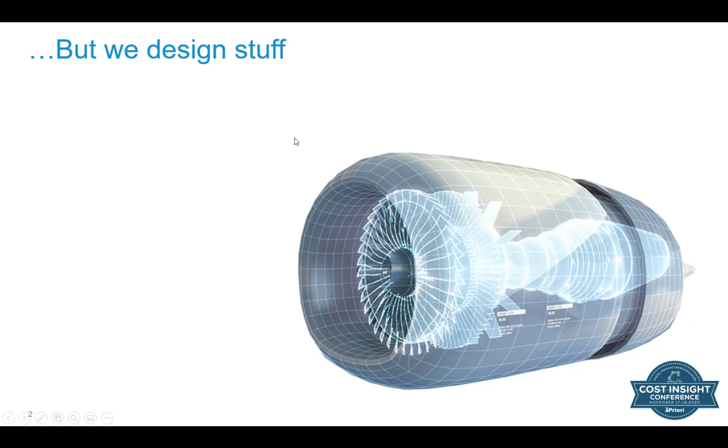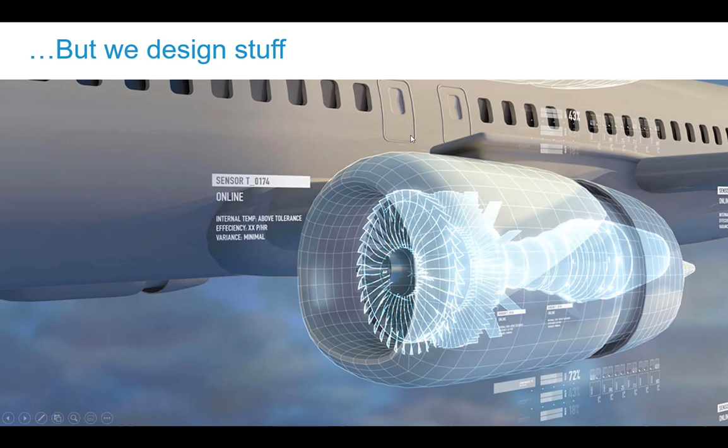Its primary function is to keep that aircraft in the sky, and cost becomes a close second, but it's increasingly more and more important for organizations that develop products. These pressures around cost come from different areas. Traditionally, they've come from finance, procurement, or even program management, where the program manager needs to ensure that product is meeting its budget constraints and is getting to market on time. But pressure is also coming from the world of value engineering, from the competition and the shareholders. The marketplace is creating pressures on the design teams to focus on cost early on.

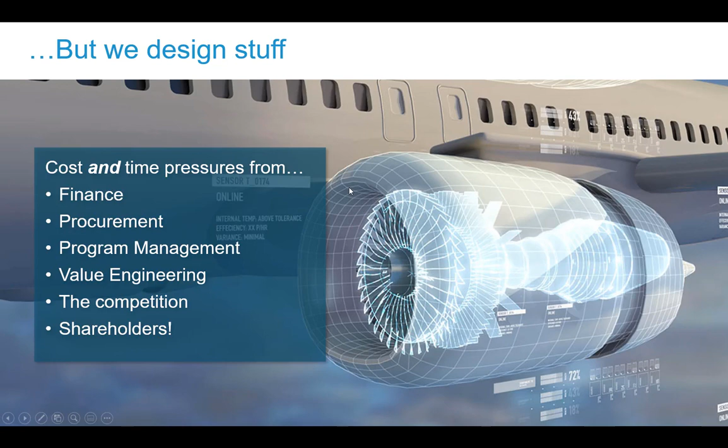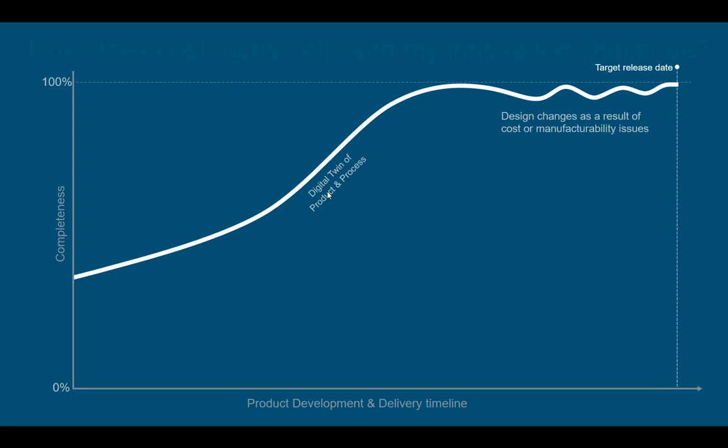Of course, we cannot afford to compromise the most important thing, and that's meeting the requirements of the design, especially if safety is a big factor. But we can focus on cost and focus on innovation at the same time. In fact, if we do, it helps our innovation challenge. If we think about the progress of developing the digital twin, the definition of our product, if we don't define it right or we get things wrong, we end up with lots of unnecessary change at the end because of design to cost or manufacturability errors. And making changes at this end of the life cycle is very time consuming and difficult. We'd rather incorporate it early on and avoid this late stage change.

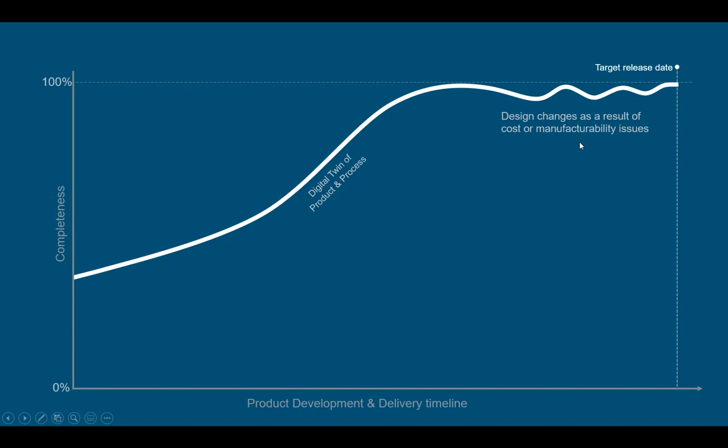So we would like to focus on cost and manufacturability early on so we can eliminate that late stage change, and that actually releases more time for engineers to focus on what they do best, innovation, and doing it with a finite amount of resources in the business to create the best products but that are affordable and right for the business. Over the period of that life cycle, the ability to influence cost goes in the opposite direction, and that's why aPriori uses the digital twin to simulate manufacture to understand where these issues may lie during the design phase.

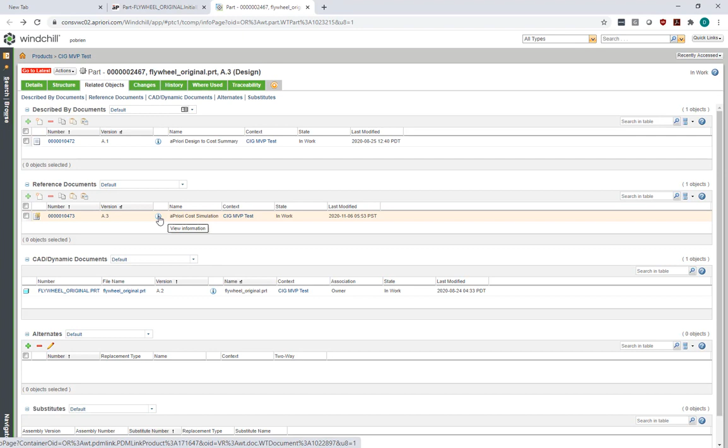But what's really important is, how do I actually solve those issues? What are they? So also attached to the part is the simulation itself. This is a simulation that's performed by aPriori on my behalf in the background. And now as a design engineer, all I need to do is read through the series of issues and understand if I can accommodate them in the design without compromising design quality.

This is a flywheel. It sits within a drive system of a drill. And that flywheel has two functions. One is to provide rotating mass to retain inertia, and the other function is to provide cooling for the motor which it is driven by. So I've elected to design it with large counterweights and some fins. And then I've got some structure to hold it all together as a single die casting part, as you can see over here. Now, down below here is a series of issues I need to now look at and consider.

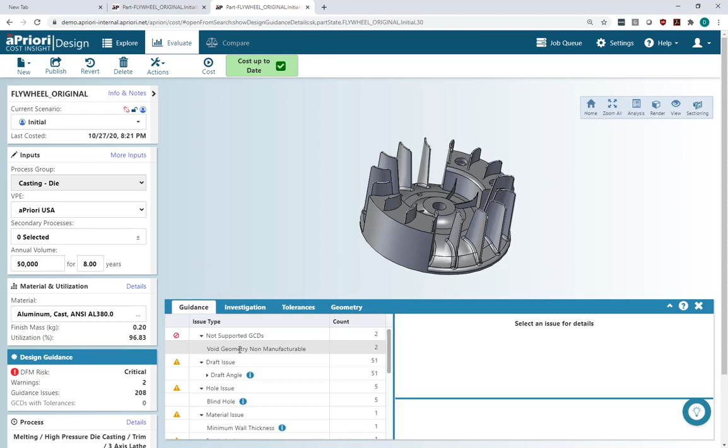The first one here is void geometry. I've designed voids into this component, which are not possible to make in a traditional die casting tool. And therefore, I need to know about this now, because I could send this off to the supplier. They could go to the tool maker, they could have a discussion about whether this is really required, come back to me a few days or even weeks later and have a discussion on email that could just delay the whole process of getting the first component made.

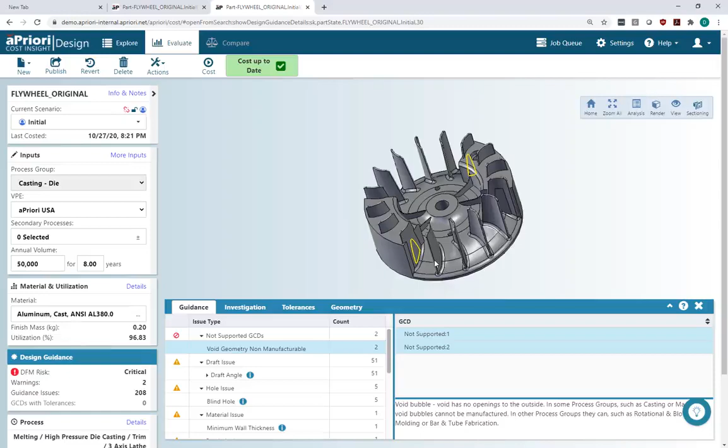I also have issues around draft as well, and there's a similar situation here, whereas if I don't consider draft angle in the design and all these yellow surfaces don't have any draft on them or don't have enough draft based on the requirements for manufacture, then I could send this to supplier, and again I could take a few days or weeks to get through the conversation about what the assumptions are and how they're going to do this.

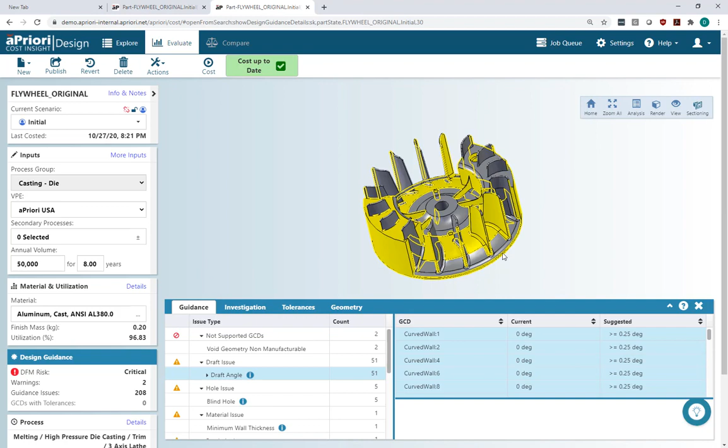Or I could leave it entirely up to the tool maker, and I may get a compromised design at the end of the process because they've made some assumptions which I should have been involved in the process of doing. Either way, it's either going to lead to quality issues, yield issues, or delays in production. There are some blind holes in this component. Blind holes are fine. I designed them in because that's what I wanted to do.

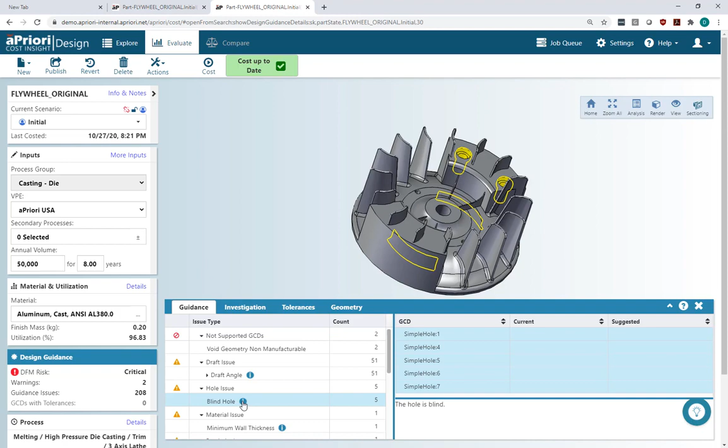And if I want to understand why they're an issue, then aPriori gives me a bit more information. And for each of these other guidance elements too, I can see why. So for blind holes, I need pins in the tool, and small pins can be fragile, delicate, they can bend and skew, and they can just cost more money to develop the tool with. If I used a through hole, then the pin would be supported at either end, and it'd be a better casting that came out, and perhaps a cheaper tool to manufacture and maintain.

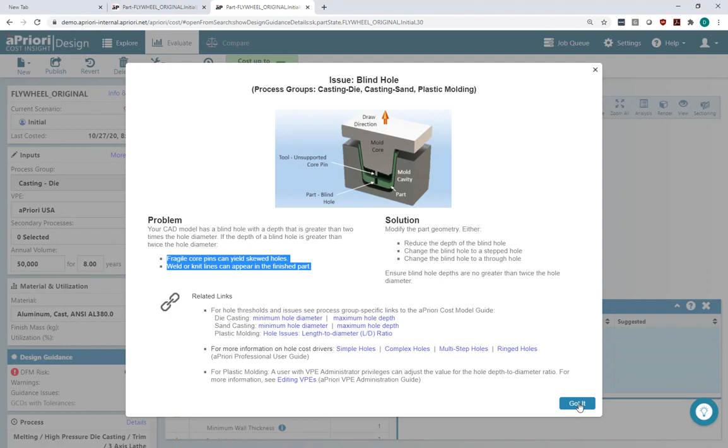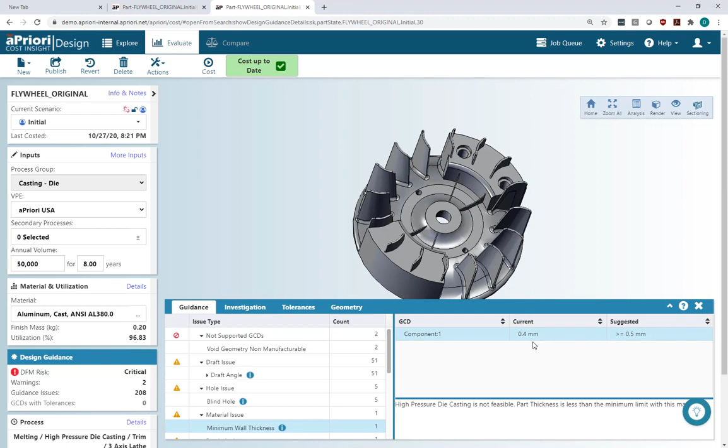So it's just saying if that hole could be a through hole, which it could be. I was just thinking about this from a machining perspective. I could cast that in as a through hole and just tap it in the machining process later on. It also tells me where I've violated the rules around minimum or maximum wall thickness in castings. Here my minimum wall thickness is 0.4 millimeters, and the minimum suggested is 0.5 millimeters.

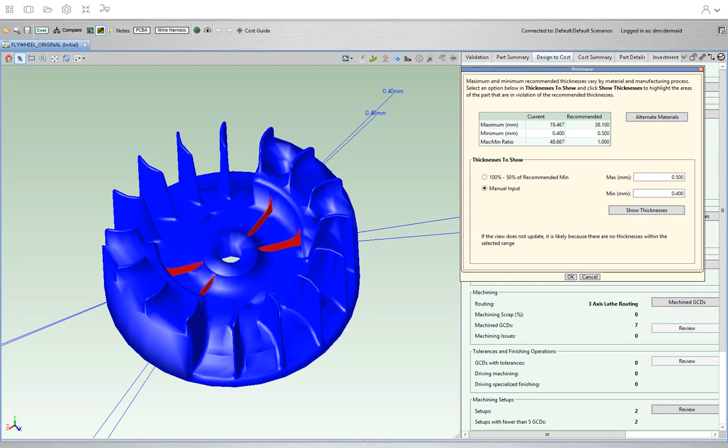And if I want to understand where these thin and thick walls reside, then aPriori can show me in the model where they are precisely. And I can use tools within aPriori to do a lot more investigation if this really is something I want to go and understand more about. Also in this list of issues, there are other things around minimum edge radius and so on.

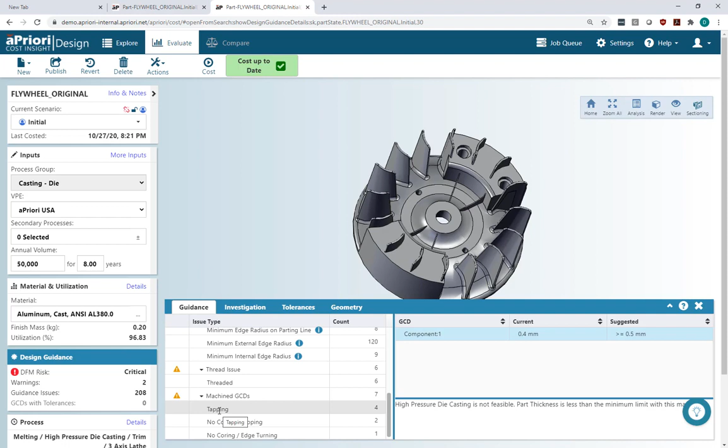It shows me all the features that are going to be created by machining operations. And this is dependent on manufacturing feasibility and tolerances. So if a hole cannot be cast to the right size or tolerance, then it will be machined. And aPriori knows this, so it works out what needs to be machined, and here is a list of the process elements required to make it, and I can see that machining, for example, represents nearly 11% of the total cost of the part. So if I want to take 11% out, I could think about a design of this that doesn't require any machining operations, and I can save a significant amount of money.

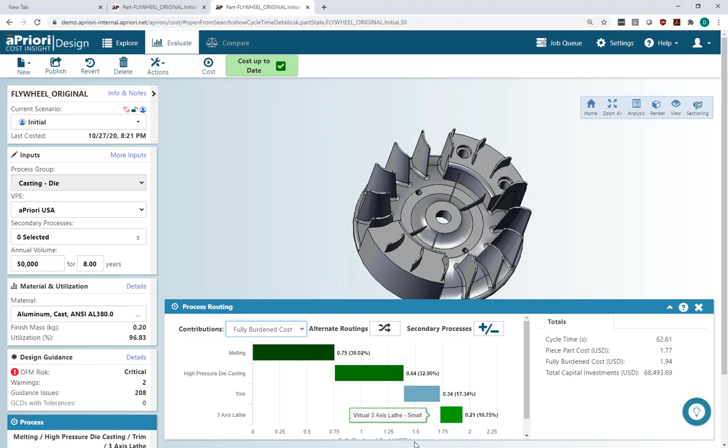So given this guidance, I need to then rethink about the design and accommodate the input into my new version. So I've gone and done that, and I do this in my CAD tool. This is Creo I'm using for CAD design, and I've designed my new component. And now I need to understand if it is going to be a better component from a cost perspective, so I send it up to aPriori's cloud to get it evaluated.

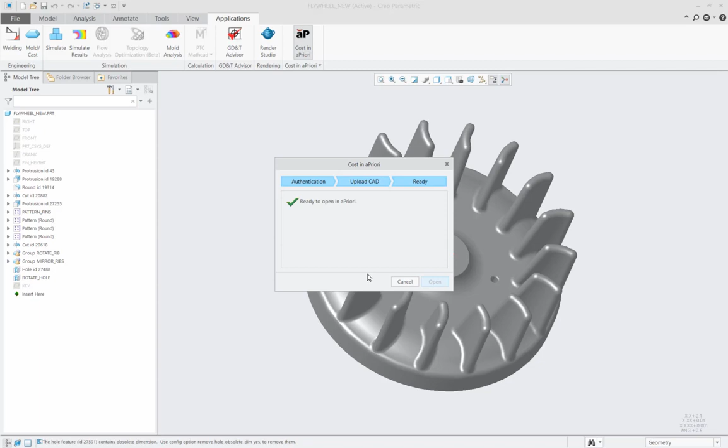All that's happening here is uploading the CAD model to our secure cloud environment where the simulation is going to take place. Now the simulation takes only a few seconds or a few minutes to do, which is great because it would normally take a few days or weeks. And while it's doing that, it's translating the geometry, it's going to process it through a manufacturing process in a digital factory, and it'll come back within a few seconds with an answer.

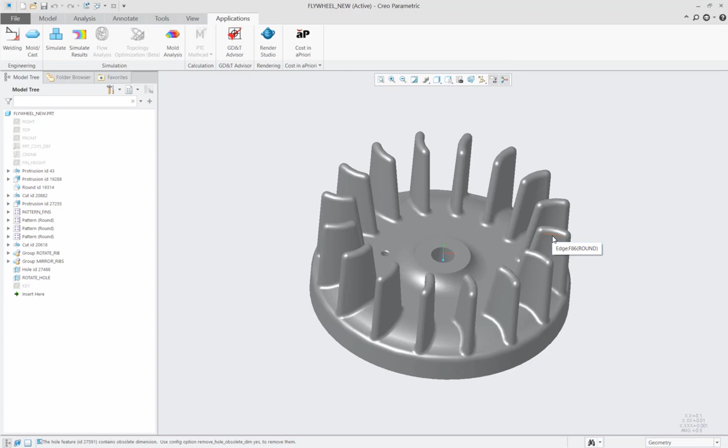But from a designer's perspective, I get on with doing what I'm supposed to be doing, designing world-class products, and let aPriori do the simulation, let aPriori identify where the challenges are going to be, and then it'll just tell me. Now what I've done with this design is I've removed the counterweights, as you can see, and instead of having the counterweight rotating mass, I've put the mass into the fins that do the cooling operation. And therefore I've got all the rotating mass on the outside in the fins, but not in big lumps of material which take up cycle time in the tool because they take longer to cool.

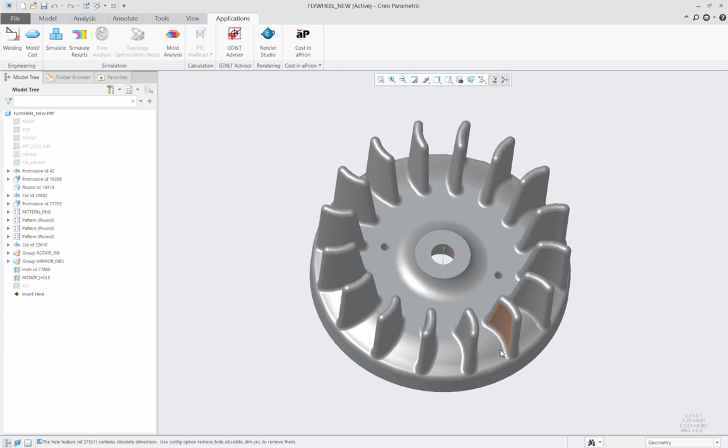I don't have the thin fins that I was using to support them, and it's just a simpler design. In fact, what I've done here is accommodate a 2-for-1. I've thought about manufacturability and the design at the same time. The fins now provide two functions in one single feature, which is good from all sorts of perspectives. So once it's finished the simulation, it gives me a result. So here's the new design. The result suggests that the cost has now gone down to $1.66, so it's a much cheaper component to manufacture.

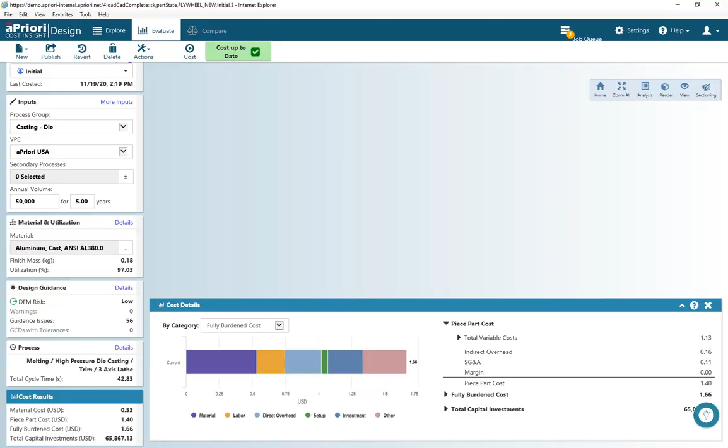And that saving over the life of that part represents about $100,000 saving just for one simple piece of advice that aPriori gave me. And I've done this within a few minutes with minimal interaction with the simulation itself. I'm just taking advice and using it to alter the design.

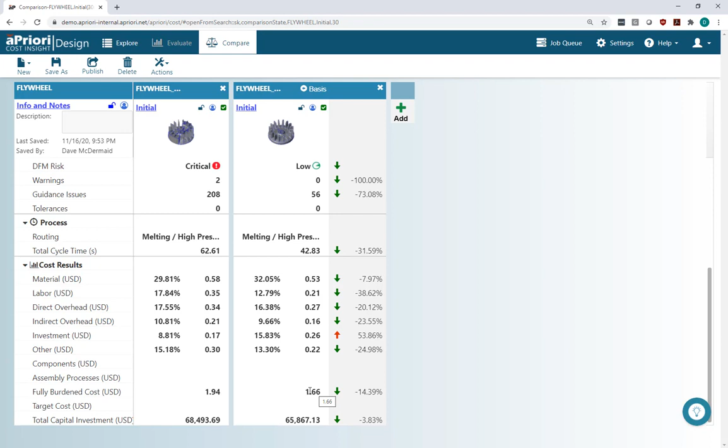And that's how aPriori supports design engineers. It provides guidance when it needs to be given. And Cost Insight Generate is the place where the simulation is performed automatically and managed within our product lifecycle management tool, in this case Windchill.